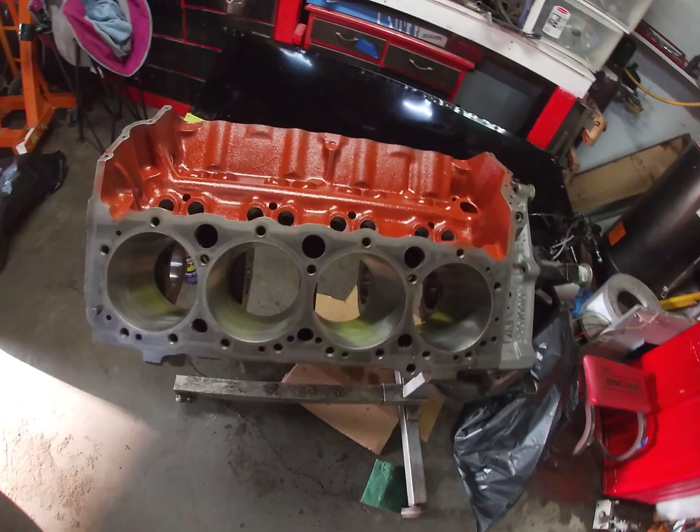And with that, we're going to get started with our video. First, I'm going to just talk about the block. It was actually a motor that I bought that was stock, and I took it all apart.

I took the block down to Mid-State Machine down in Des Moines. They did basically bore and hone, line hone, all the stuff you do to them, new cam bearings, freeze plugs, stuff like that, so they cleaned it all up for me. That was probably towards the beginning of last year, so I've just been keeping it covered up since then, because I knew it was all good and would pull it out when needed.

And now we're going to use it, so we're going to start file fit testing the rings for file fit and see where they're at.

When you get rings, there are two types. You have standard fit, which you don't have to file, and then you have file fit rings, which you basically file down to the sizes you want. It takes a lot more effort and time with file fit rings, but it allows you to get a better fit than just out of the box, put it together and put it in kind of thing.

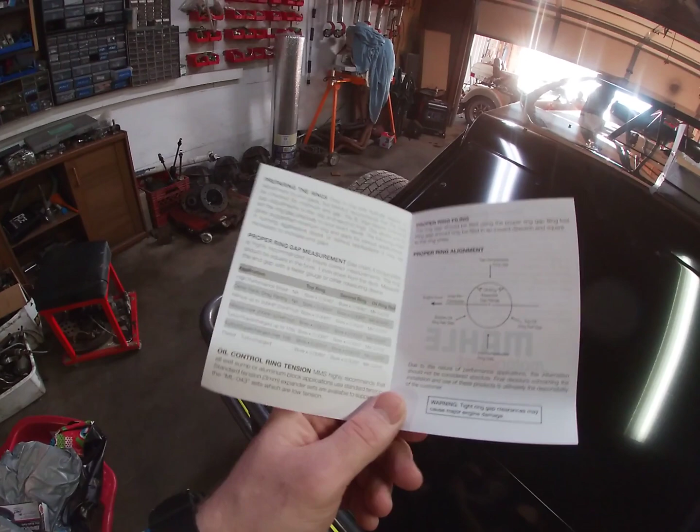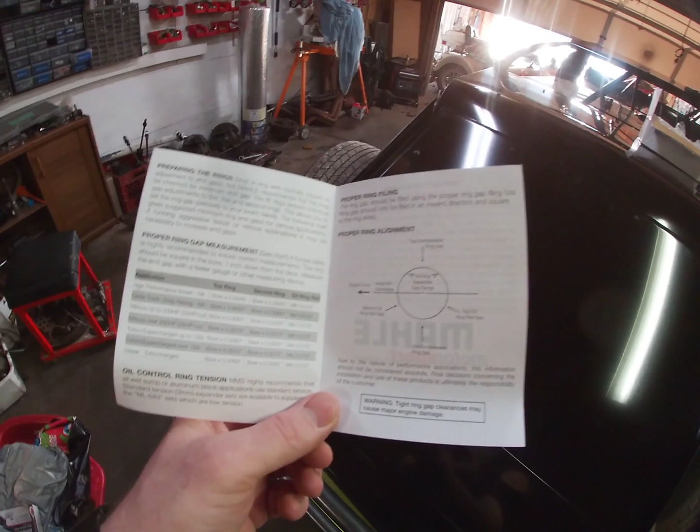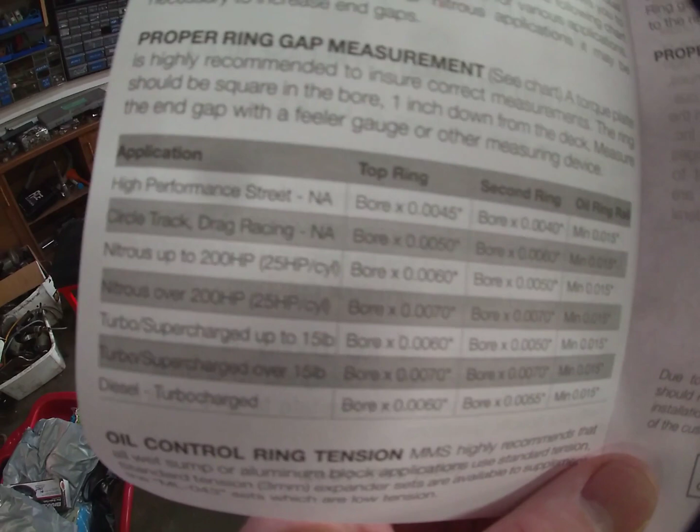So if you don't know whether your rings are file fit, basically there's a little pamphlet that comes with it. If you open it up and it doesn't say anything about gapping them, then you're good to go. If it does, like this, it tells you the top ring, you take, depending on your application here, your bore times a certain number, and that'll give you what gap you want.

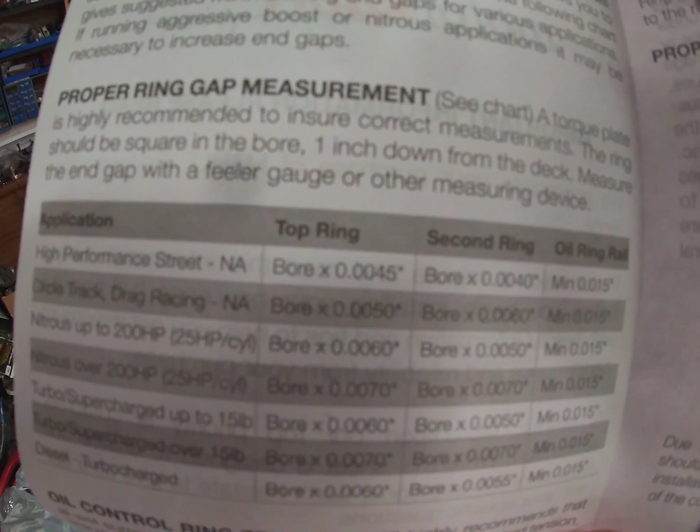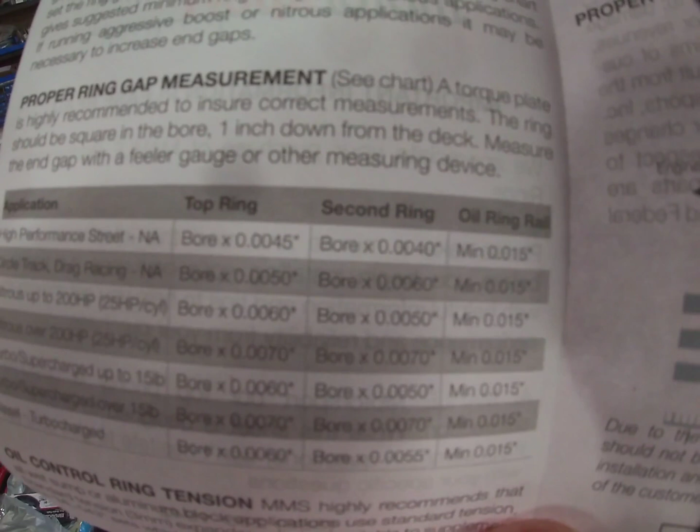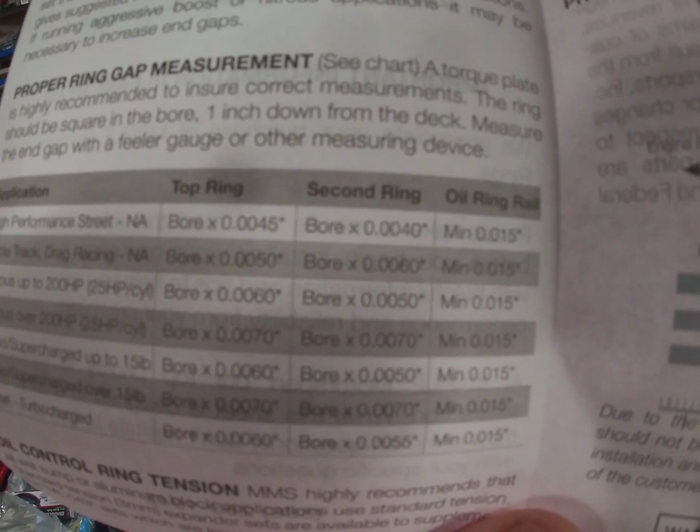Now for mine, circle track, bore times 0.005, 5 thousandths, and that'll give you what you need. So my bore in this motor is 355, so it's 4.030 times that 0.005 gives you about 20 thousandths. So for the second ring, it's 6 thousandths, so when you multiply the bore times 6 thousandths, you get about 24 thousandths. So my top ring will gap to 20 thousandths, my second ring will gap to 24, and then the oil ring's a minimum of 15 thousandths.

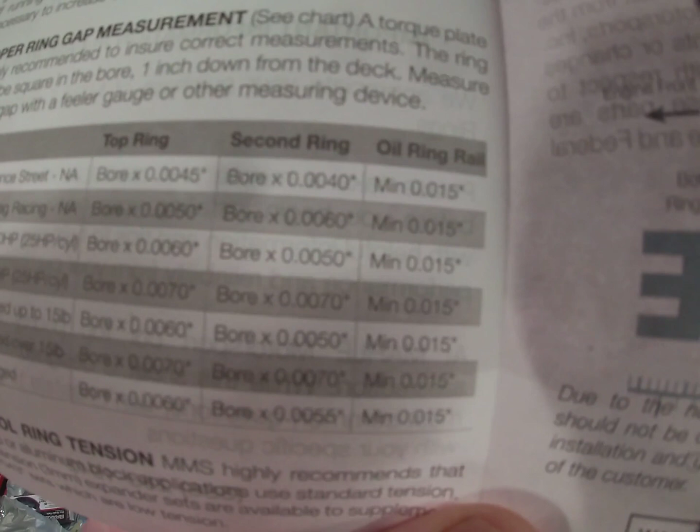Usually those are pretty close, you don't usually have to file those. I don't think I had to file them last time, so hopefully I don't have to file them this time, because that's kind of 3 rings in one, so it takes a lot longer if you have to do those.

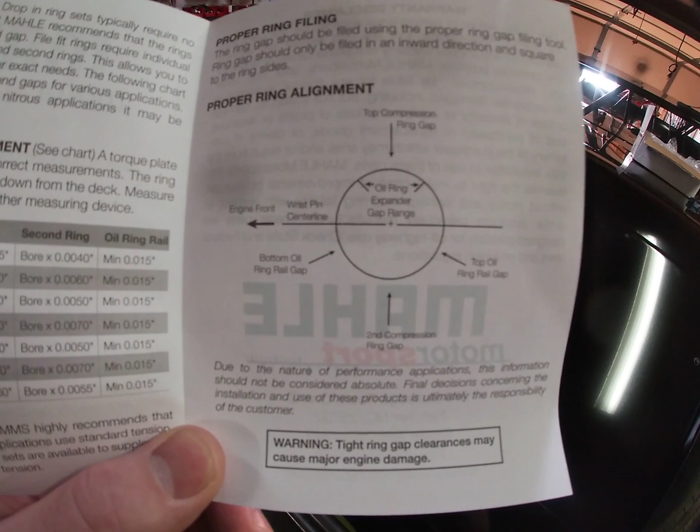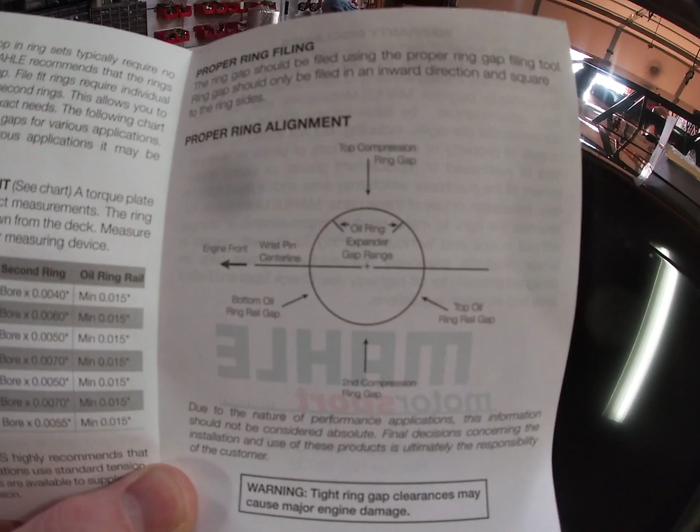I'll show you this when I'm putting one of the pistons together, and then I'll probably fast forward through the rest of them. But you offset your ring gaps when you're putting them together, and it'll be easier to explain when I'm doing it. The reason for doing that is so that you don't have all of your gaps on one side, and basically you don't have very good compression if you do that. So you want to make sure it's gapped appropriately and make sure your gaps are all offset so that you're not losing compression.

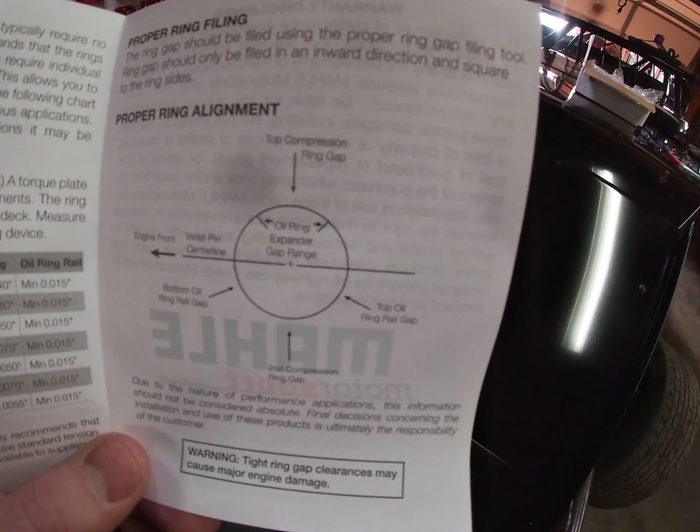So now how we check these rings to see where they're at just coming out of the box: you're basically checking that gap between the end of it, but you're going to put the ring in there, and then you're just going to take the piston and push it partway down the cylinder.

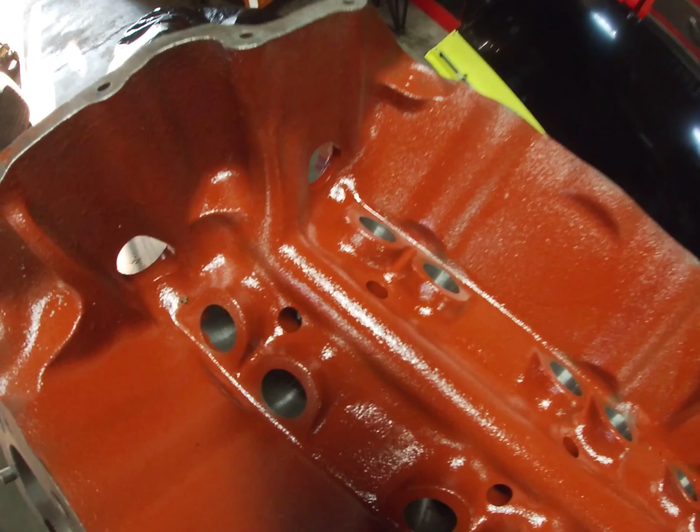This is actually tight enough that I can't even push it, so we're going to have to grind it down just a little bit first. So basically what we're going to do is file, this is pulled back out now so there's a gap there, but we're going to file one of the ends of this ring so that it fits in there better and get the gap we want.

That's really all the gap that you need in these. It's better to be a little over on the gap than under, because as they get hot, they expand just a little bit, and without that room to expand, it's going to bind up and seize up on you. So it's better to be just a little bit big than a little bit small.

They recommend 20 thousandths on these. Mine's probably 23 on this one, so it's a little big but not too much. We're going to keep doing that for the rest of these, get them all set, and then we can start assembling the pistons and putting the crank in and stuff like that.

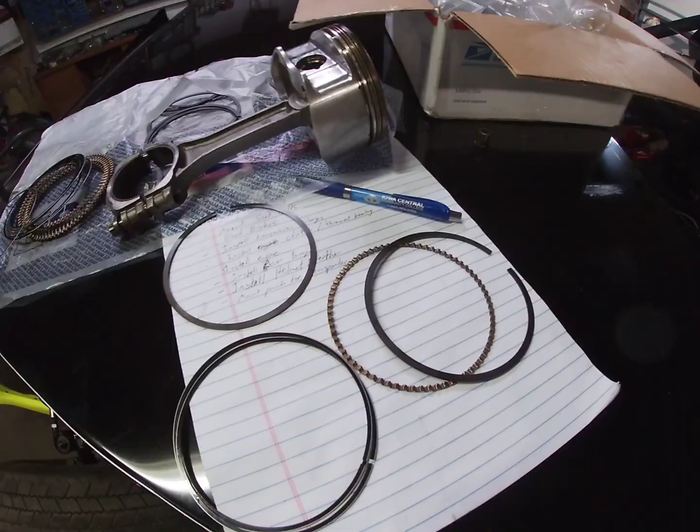So we got all the rings filed down. We got Donna over there making sure the rods are in the right direction. Losing more clips. Nope. Found that one?

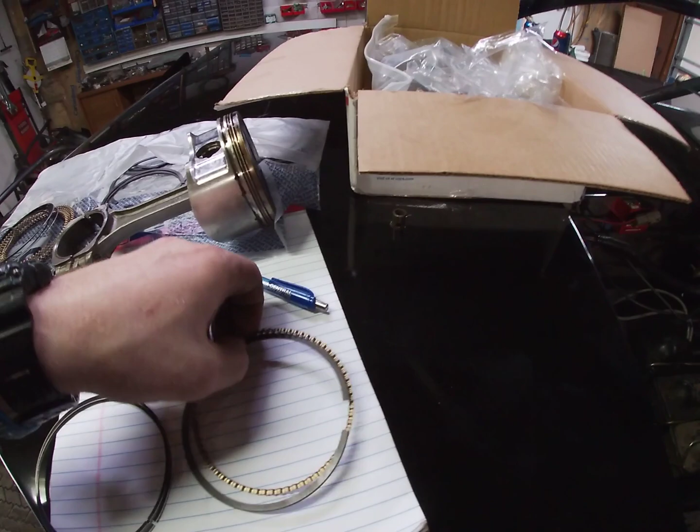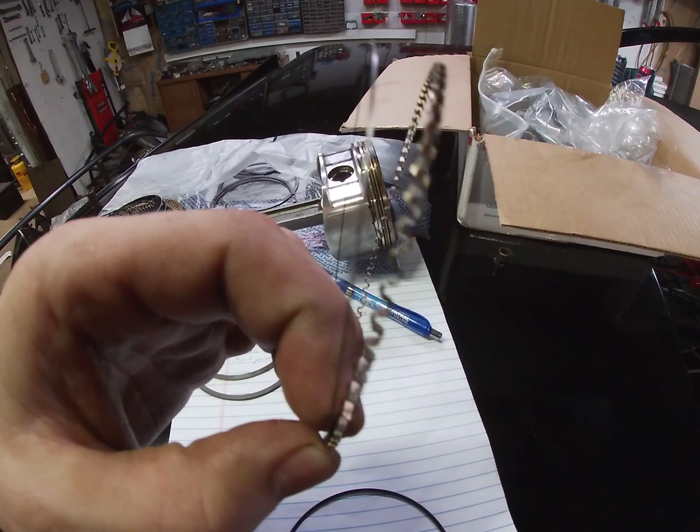Yep. And how these work is, I got these mixed up. So you have these, I even got 3 of those. You got these 2 really thin rings, and this ring here make up your oil ring. Basically, it's one of the thin rings, then the corrugated ring, then the other thin ring, and they're going to go in that bottom groove.

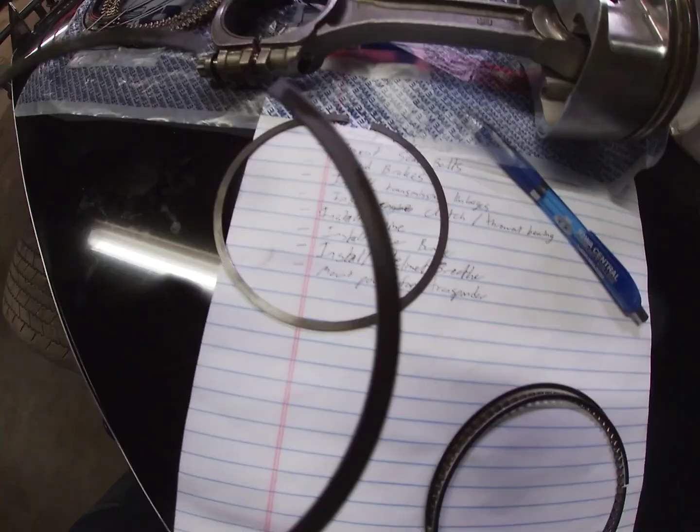And then you have the middle ring. I don't know if you can see the mark on there, but there's a little M on there for the middle, and it also says top on each one of these, the middle and the top ring. Like this one says C top. I don't know if you can see that, but a lot of rings will also have a little dot on one side if they're directional. Not all rings are directional, but some of them are. So that's how you tell what side goes up.

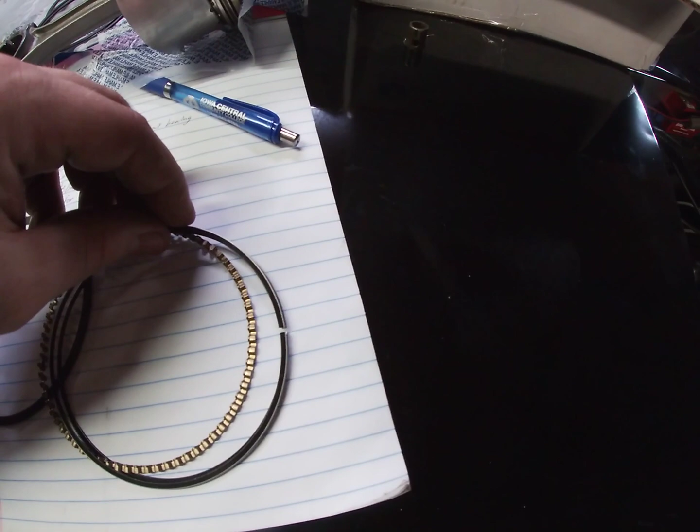But then your middle ring goes in the middle groove, and your top ring goes in the top groove. When you're doing these, you want to make sure to offset them. If you don't, basically they all have these little gaps. If you have all the gaps lined up, there's a place for all the gases and oil to get through. So you want to make sure they're offset. Everybody has their own way of doing it.

Did you lose that one? Yeah. Well, this thing's probably shot out of there on the other ones.

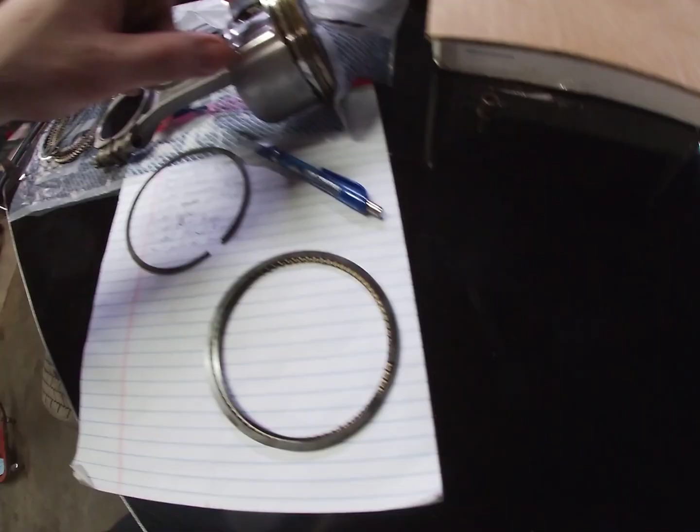I base it kind of on where the wrist pin is and the direction it goes. So one of the bottom rings will be perpendicular to the wrist pin. The other 2 will be offset, and then these will be along with the wrist pin. The reason I do that is it makes sure that the gap on the top ring is either not at the top or not at the bottom. The reason for that is if it's on the bottom, it allows oil to come through and drain back, and then you got a dry cylinder when you go to start it up.

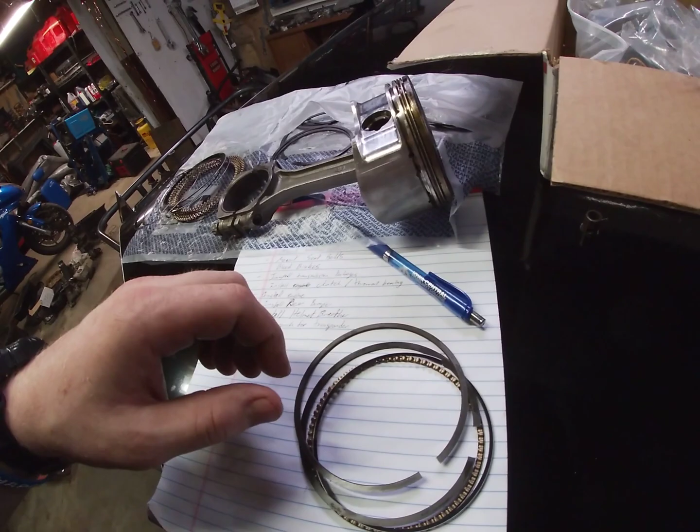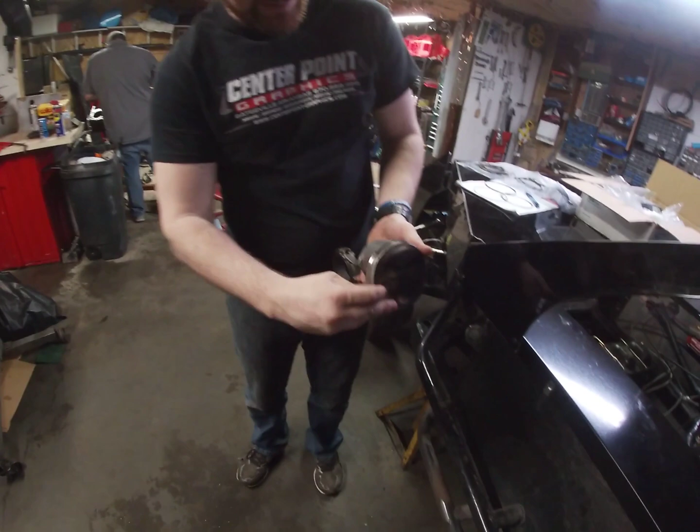I'm gonna put those together, and I'll do this one and let you guys watch, then I'll fast forward through the rest of them. These oil rings don't have a top or bottom, the other 2 do. Basically, you're just setting it in there. This first ring I'm gonna put perpendicular to the wrist pin.

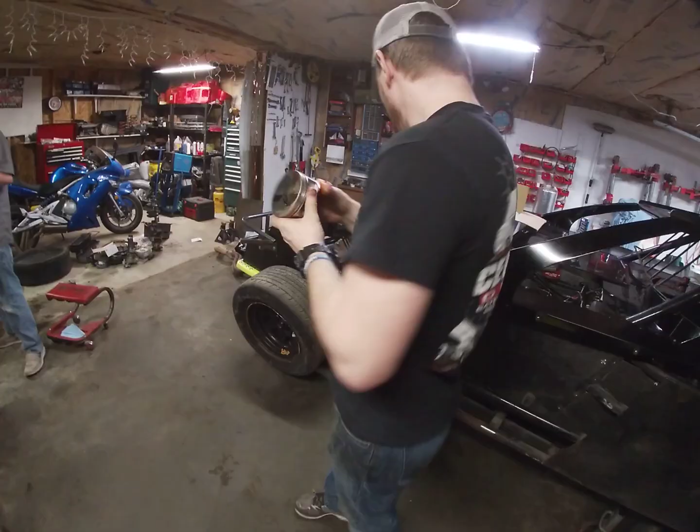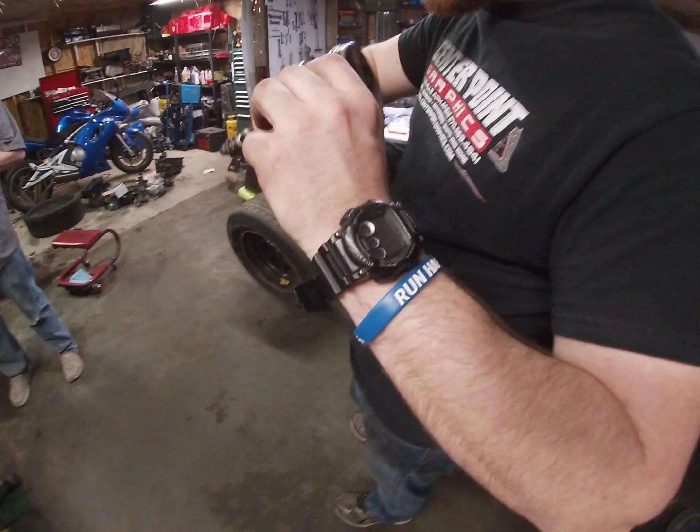The next one's going to be 120 degrees away from that. Sometimes you have to put these all in at the same time because of the gap. Okay, now I got those lined up. So there's the gap for the top ring, right there on the piston. There's the gap for the middle ring, and here's the gap for the bottom. So they're offset 120 degrees from each other. And the middle ring, that one's the top ring.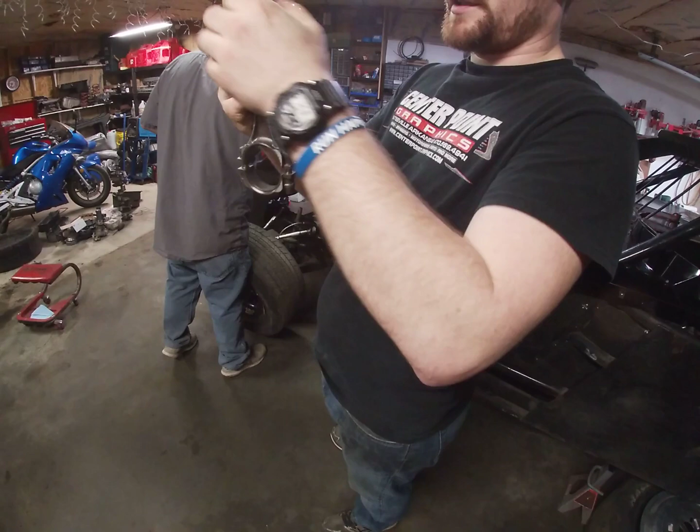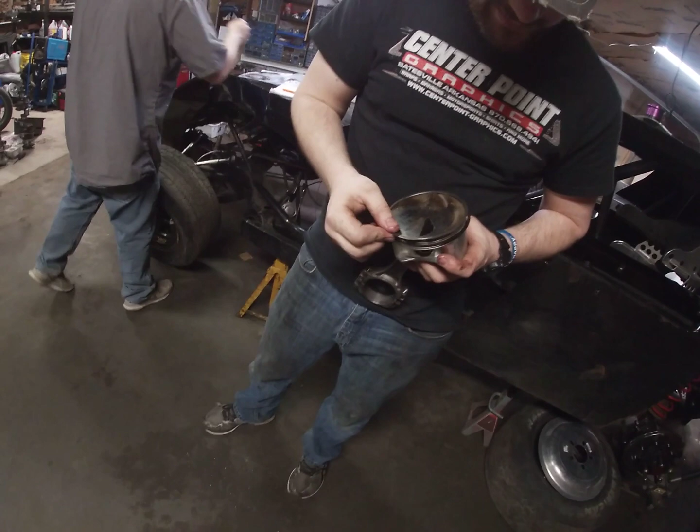Which side's top? That side's the top. So we're just going to set that off to one of the sides, parallel with the wrist pin. Set one side in, and then when you bring it around, it should set the other side in. Wherever that one is, we're going to go 180 degrees for the top. Make sure we got the top side of the ring, either the dot or where it says top, facing up. Set one side in, and then just kind of work it around. That one's done, now it can be put into the motor when we're ready.

So you guys know, put the middle one in first. The middle oil ring, not the middle ring. I've done 2. There's 1 left after this.